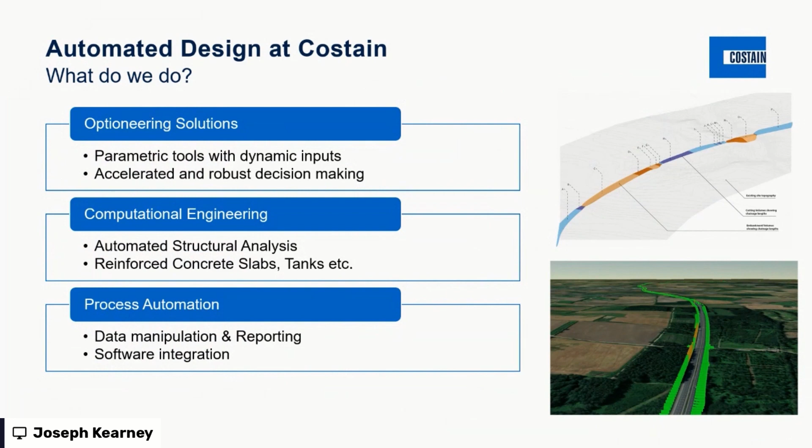What we do as a team spans the design and delivery lifecycle, from feasibility studies to detailed design to supporting our site teams on construction projects. I've broken it down into 3 rough pillars. The first is optioneering solutions: the development of parametric tools that give us the information we need to make decisions. The second, in the detailed design space, is computational engineering tools—automating things like structural analysis of simple repetitive design, and I'll give examples later. The third pillar: we're increasingly using many different pieces of software, and our engineers spend lots of time manually handling data, so how can we automate the process to avoid this?

So why are we doing it? Hopefully most of this audience will be on board with these points. In the traditional design process, we only really have time and budget to produce or investigate a small number of solutions. Significant effort, time, and budget is needed to test the viability, sustainability, or cost of these solutions. Our view is that parametric tools and parametric design give us the ability to calculate lots of different solutions and optimize options against different metrics, giving us a better chance of delivering better value for our clients. We also have lots of engineering experience locked away in people's brains—this is about unlocking that experience and capturing it for future use, so we don't go back to the drawing board at the start of every new project. And what if we could link our processes to our designs rather than referring to them as a standalone document?

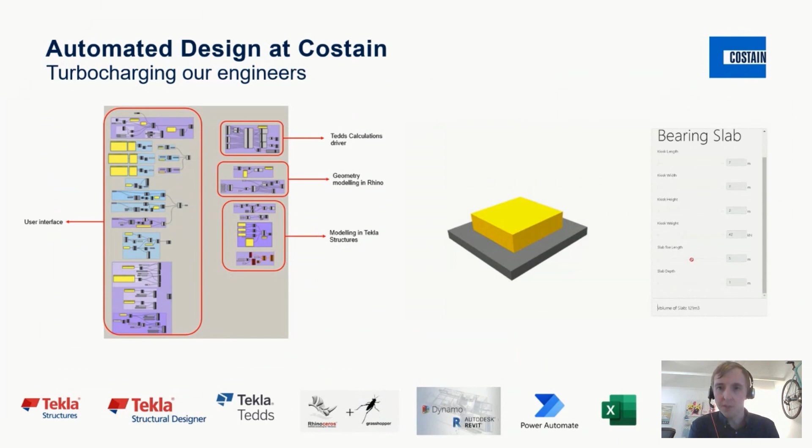So how do we do it? One of the key tools in our arsenal is visual scripting, which I'm sure most people here will be familiar with. Our team are engineers, we're not computer programmers. These are often low or no code solutions that are driven by digitizing the logic behind the design. So that makes it really accessible to our engineers - you don't need to be able to write complex Python scripts to build and run these tools.

Although I am looking forward to some of the sessions this afternoon on Python coding for engineers, and what the future of engineering looks like. I think, especially in the UK, a lot of degree courses mean our next generation of engineers will be graduating with these skills. But for now, we see visual programming as lowering that level of adoption for our current engineer skill sets. Our engineers know the logic that goes into their designs, so they can build these scripts themselves with our support, and that's what our team are here for.

So the key to these things is often starting simple. In our civil and structural engineering team, for example, we've looked at how we could automate the design of reinforced concrete slabs that support equipment kiosks - a really simple example, limited variables, designs relatively low in complexity, and usually repeatable. We do this a lot on our projects.

The idea here, and the power with these tools, is that we can link the calculation to the key parameters in our visual script. We can also bring in the structural analysis checks - our structural analysis software is live linked to the geometry creation, so we don't have to pass information manually back and forth between designers and engineers. It's all linked in one script, and we can then play tunes with that.

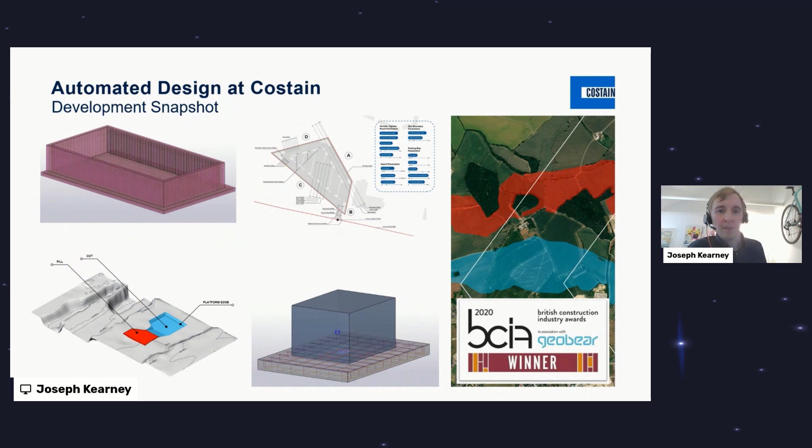So another key opportunity to capitalize on automation that we've found is for the design of long linear infrastructure projects, like roads or pipelines - which brings us to the image on the right and a product we call U-Route. U-Route combines geospatial data with engineering analysis to help us route cross-country pipelines in a way that's transparent, repeatable, and scalable. Some of the points I highlighted a bit earlier is why we're doing this.

When we started developing U-Route around 4 years ago, we've used it now on multiple energy and decarbonisation projects across the UK. So applying similar logic, we're now applying that to other linear infrastructure projects - for example, rapid transport schemes and potentially high voltage cables and other pieces of linear infrastructure.

The key thing here is that this isn't a black box. It's a process that our engineers have developed and are still developing, so it provides greater insight and transparency in the design decisions that we make. It combines GIS tools with engineering insight. We've built it again using a visual script that engineers can interrogate, and we have the control to change that script.

So I'm just going to show a quick example of how we use that software to combine that engineering knowledge and key considerations for a linear infrastructure scheme, such as a pipeline, and how we've really accelerated the decision-making process.

So on the screen here is almost a blank canvas. This is an example project we did a couple of years ago, and we start by capturing our client's problem statement, so we can build in various push and pull factors or penalty scores. Do we want the shortest route? Do we want to follow an existing route? Do we want to take into account particular landowners?

Initially on this map, we've excluded occupied buildings. A simple rule for routing a cross-country pipeline is that you can't go near or under people's houses. We use the data set for the whole of the UK to remove those from consideration. We don't know where the pipeline is going yet, since this is for a feasibility study, so let's imagine it can go through any of those green pixels. We'd then classify those based on other infrastructure and other things that are there.

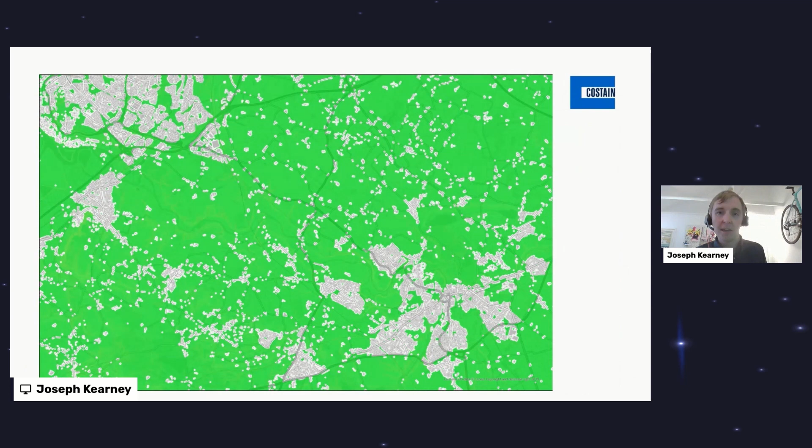As we add complexity to this map, for example we want to avoid areas of steep terrain, avoid crossing under motorways more often than needed, railways, roads, environmental designations, and we end up with a heat map that gives us the big picture within that study area. This is obviously a simplified version—we haven't got things like wind turbines and other utilities that might not be publicly available—but we're basically penalizing areas less suitable for routing from A to B.

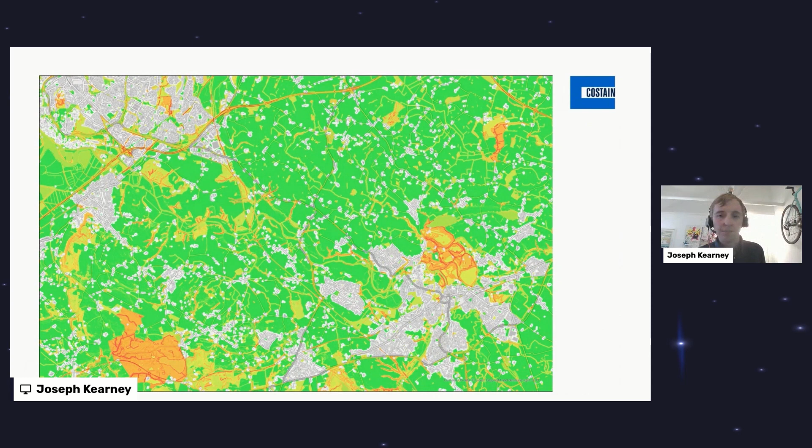Since we don't know where the pipeline's going, and we want to use the power of computation to give us that answer, we want to potentially route through every single pixel and give it a score. That's what we do with our geospatial software. As we calculate the cumulative cost to route from A to B through every single pixel, we start to be a little more selective about the pixels we want to see.

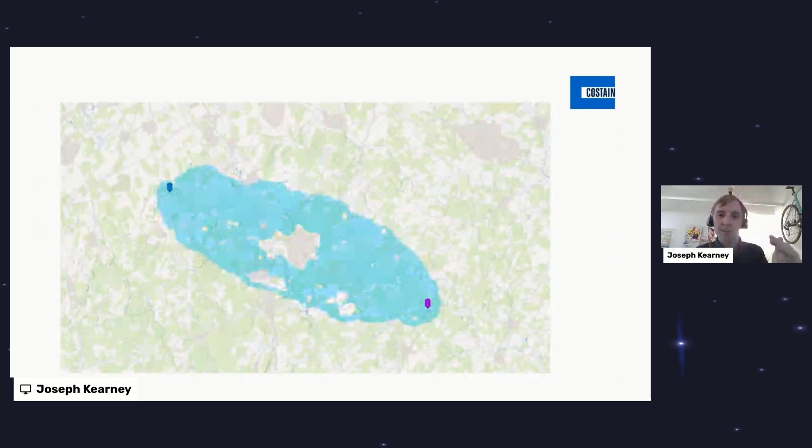We might not be interested in going through the pixel in the very top right of the map because the score is ridiculously high, so we may only want to see the top scoring 10% or 5%. What we can do is quickly filter out what we're not interested in and focus on the key routes.

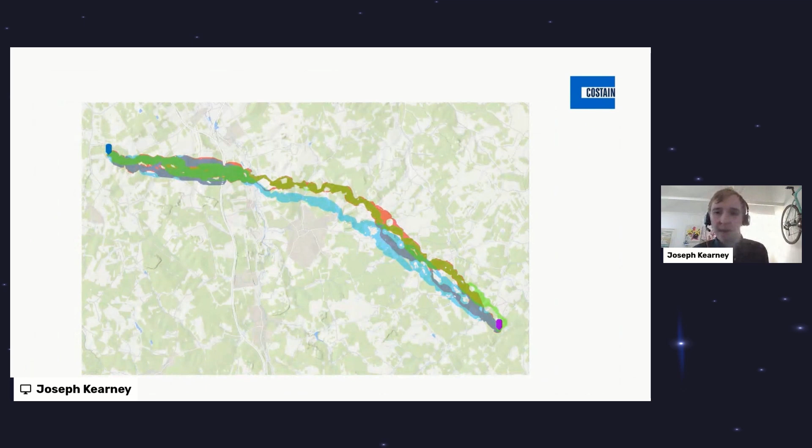And then we can play tunes with the weightings to give us various different options. This is where this tool really goes beyond a simple geospatial exercise. For example, on paper you might think the shortest route is the cheapest, but the shortest route may mean you need to use more material because you're closer to populated areas, so you need a thicker pipe. There's lots of factors at play here—it's not just a simple case of picking the shortest route from A to B.

But the power of this tool is that you can really quickly see the impact of any change. For example, if we're negotiating with a landowner, we can quickly visualize the impact of having to go around their land or avoid their particular plot. We can simply add that data in and rerun the analysis to see where the difference lies.

Depending on the size of the study area, sometimes it's a case of going to make a cup of tea, coming back, and it's rerun, or it may need running overnight depending on how large the study area is.

But again, like the reinforced concrete slab tool, we're also developing scripts that sit onto this and look at automating the production of the design deliverables—route maps, schedules for reports—and we're seeing a significant reduction in the amount of manual data handling.

Think of how long it would take to produce maps of these routes for a 200-300 kilometer pipeline or road. You don't want to be doing all that from scratch every time. So having scripts that do the donkey work, the bulk of the work for you—it's never going to spit out a complete deliverable, it's always going to get you a certain percentage of the way through, but we find that really powerful.

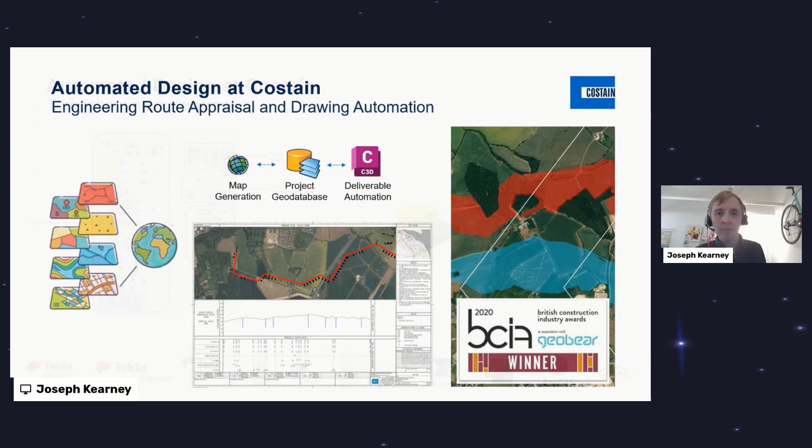So what I want to finish and touch on is what if someone just wants to jump on and have a quick look at something? What about our site teams that maybe don't have the software? They just have an iPad, or they're out on site and want to gain some insight from these tools. This is where web-based tools like VIKTOR come into their own and have a real benefit. So what I'll finish with is something we're working on at the moment with the VIKTOR platform and how it can help our project teams make better decisions.

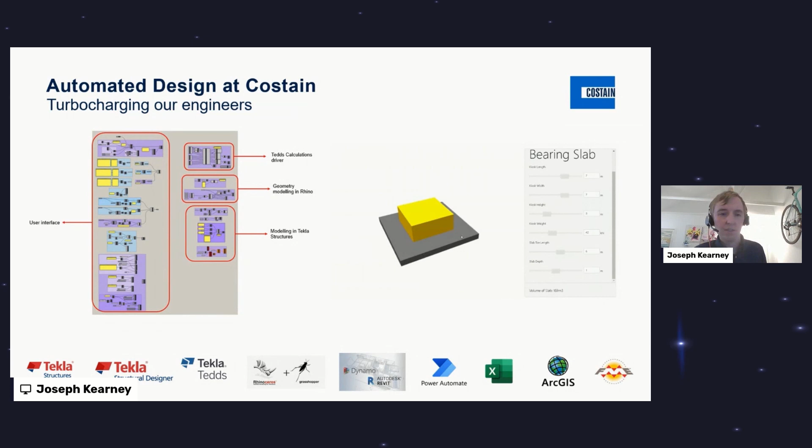So this is in development at the moment. We're really close to being able to share it with the community once we've trialed it on a real project. This is a tool we're working with our sustainable design team on, and it's the development of a decision-making tool for different types of site haul road.

It's based on relevant UK highways codes, but the idea is it helps us to quantify the total embodied carbon of a haul road, and combined with materials and maintenance cost, it will really help our site teams to make a data-driven decision.

We can use the VIKTOR platform to set questions. We should really be challenging this brief: have we considered alternatives to a haul road? Can we get material onto our sites in a different way? Only when we have to build something are we then allowed to proceed and produce a design that's optimized against carbon and cost.

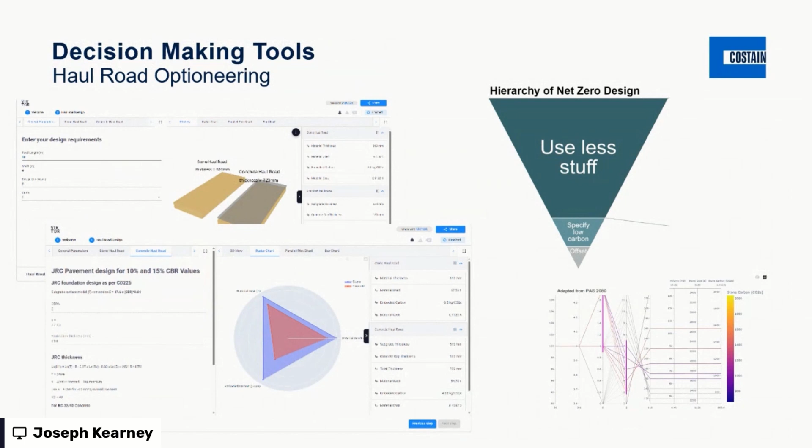So we think at the planning stage, this will be a great tool to rule out different types of haul road depending on the conditions. It'll let us provide live comparisons to a number of different haul road options in real time. We'll be able to see how a change or improvement in parameters will increase the efficiency of a haul road.

For example, not being a civil structural engineer, I wasn't aware of how much impact the design life of these haul roads has on the decision between, say, a stone haul road and a concrete haul road. I would assume a stone haul road would always have less embodied carbon than a concrete haul road. But when you take into account the maintenance of these things every 6 months, you've got to reapply stone and things like that.

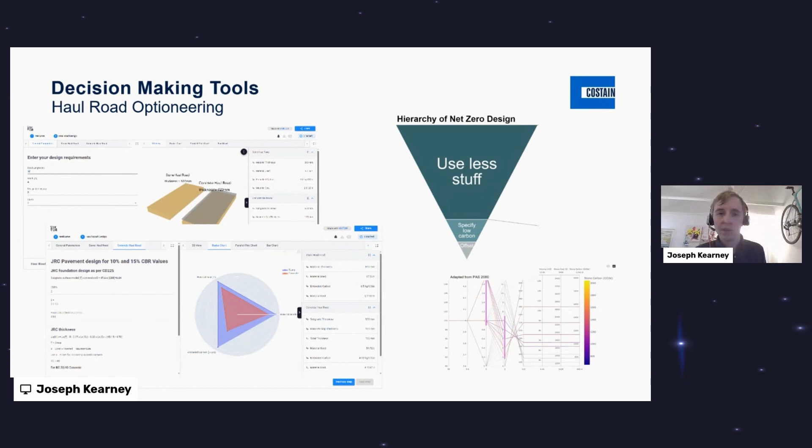Using this tool has been a really great illustrator for the break-even point for some of these decisions, and the power of it being web-based is that anyone with a laptop or a phone can access this tool. So it's still early days with this tool, but we hope it'll become part of a suite of digital tools that our teams can use to make better engineering decisions.

So that was it from me. Thanks for listening. A bit of a whistle-stop tour through the work we're doing at Costain to support our engineers to automate and improve our design efficiency. I'm happy to take any questions, and hope that was interesting for people.